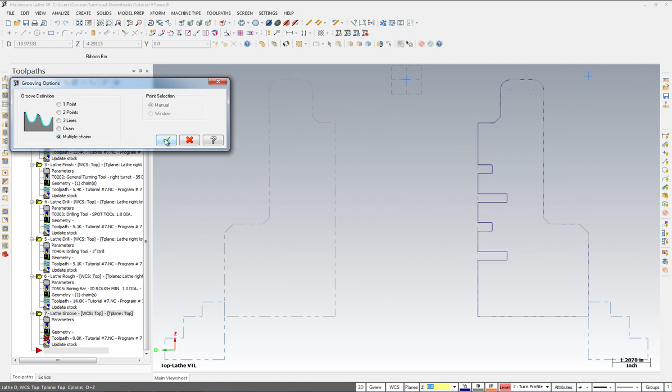From there, we are going to select multiple chains and select OK. As you can see, partial is our chaining method, and we're going to come over to this groove here and start to chain it. Again, you can unselect a chain, and you can also reverse your chains if need be by selecting the unselect or reverse button found on the side here. So this is your unselect, and this is your reverse chain.

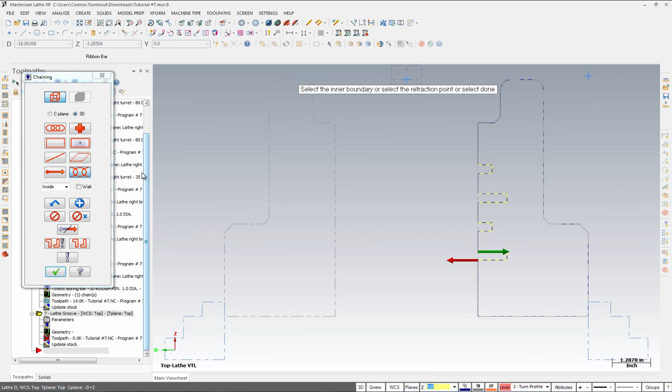So basically, you want the green arrow heading in and the red arrow heading out on all these, and we're chaining every single one of them. So once this is done, come over to the left-hand side, and we are going to select OK. Now we are going to look for an inner diameter groove with a 0.75 diameter. My tool is already selected for me. It is tool 0606. Your tool might be 5353 and about halfway down on the tool list. But once you've found it, go ahead and select it.

Once you've selected it, just right-click it and go to Edit Tool. From here, go to Setup Tool. And under Setup Tool, we're going to make sure that the mounting position is vertical and the turret is to the right. We're also going to go ahead and select OK when this is done. Now we are going to go ahead and skip to the holders page right here, as you can see that these values are fine and don't need to be adjusted. So just come to the holders page.

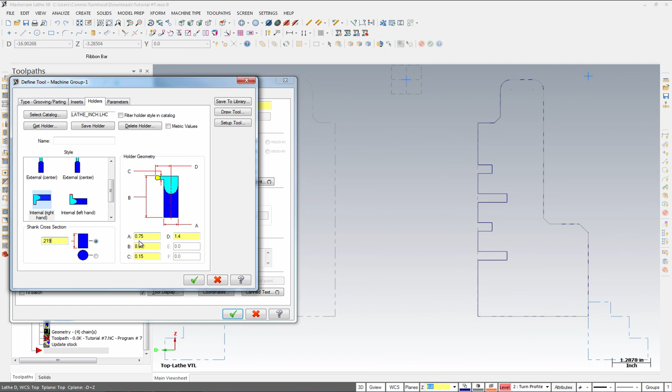The shank cross section here needs to be 0.219. A needs to change to 0.75. B needs to be 8. C needs to be 0.15. And D needs to be 1.4. So once these values are locked in here, just go ahead and select OK to exit out of this dialog box. And we're going to insert the comment, machine the ID grooves.

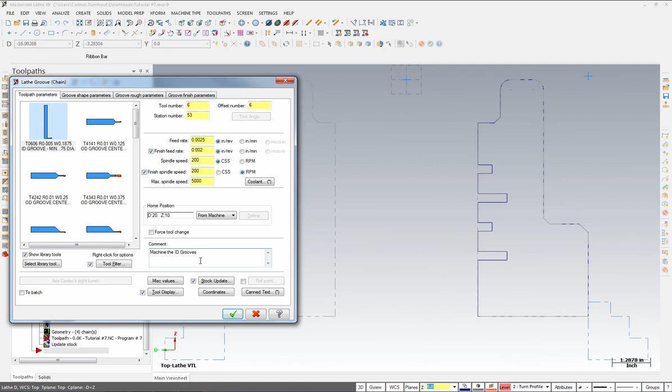Once this is done, come up to the top and select Groove Shape Parameters and go ahead and turn on Use Stock for Outer Boundary. Come up to the top, select Groove Rough Parameters and ensure that the values match those in your training tutorial. Something that you guys might miss, the groove walls, instead of doing steps, we're going to change it to smooth. Everything else should be defaulted as shown in your training tutorial.

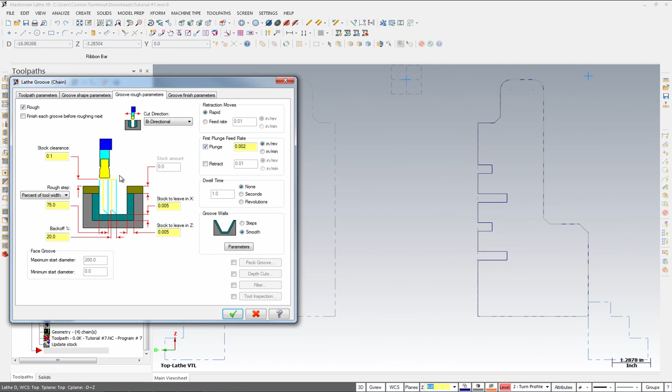Once this is done, come up to the top and select Groove Finish Parameters, and we're going to change the overlap between passes to 30 thou. Once you have that, select Enter, and go ahead and select the Lead In button here. In the first pass lead in, we're going to make sure that the angle is 90 degrees, or minus 90, and hit Enter on our keyboard. You'll notice that this will adjust to the right-hand side as well.

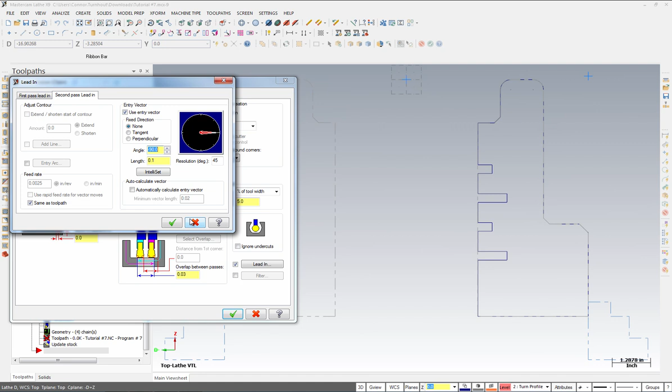We're also going to go to our second pass lead in, and we're going to change the angle to minus 90 as well. So hit Enter on your keyboard again, and go ahead and select OK, and OK one last time. From here, you should see your tool start to cut. Once this is done, just go ahead and highlight all the folders by shift-clicking and run your verify.

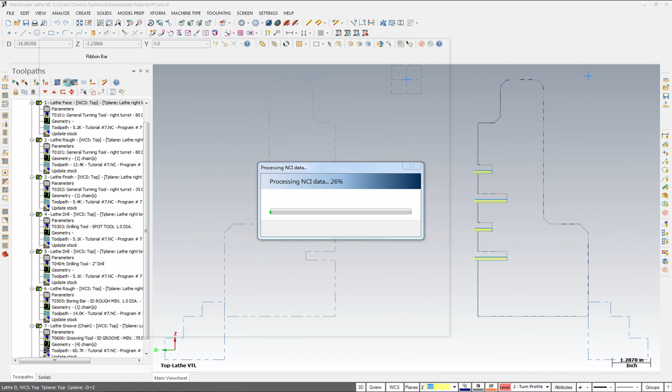So I have my stock as transparent, but I'm just going to select the play button and then I'll solidify my stock so you can see it that way as well. But for the time being, I'm just going to show the transparent stock so I can see my drilling and I can also see my inner diameter tool paths being cut.

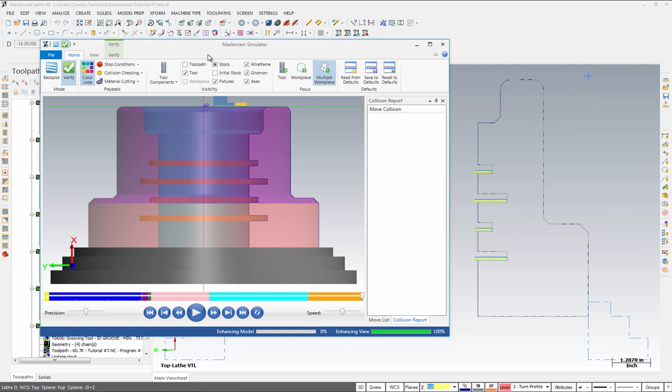So your part should look like this, and if you go ahead and select stock and you turn it on, you can kind of rotate and see what your part will look like. I'm just going to isometric so I can see it a little bit better on the inside. It should look something like that. So once you're happy with this, just go ahead and exit out. Come over to the left hand side here and toggle your toolpath display.